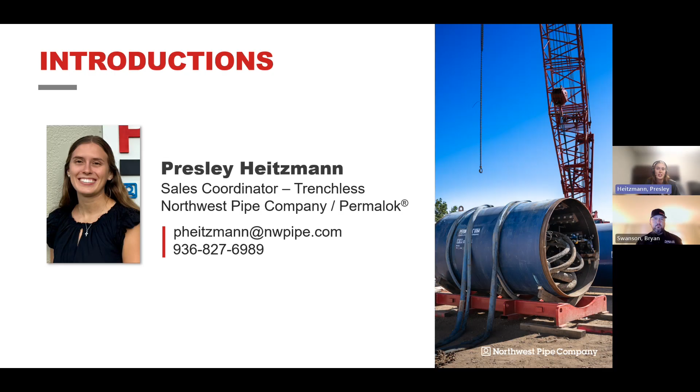Hey guys, my name is Tim Connors, I'm Permalok's project supervisor. I've been with Permalok for almost 5 years now. As the project supervisor, I'm going to basically be taking you from start to finish. I'll take care of all your submittals. Once the quotes come over, I'll be working with your point of contact on your job site, making sure everything is going well. If you have any questions or issues, I want to make sure you give me a call so we can get this taken care of for you right away.

I'll also be keeping you up to date on the production of your project, making sure you understand where we're at—we've begun making the pipe and we're getting ready to finish. I'll be handling the logistics and delivery of your pipe, making sure you're all set for whatever needs you might have at the delivery site and any concerns you may have, we'll take care of that. I'll be taking care of your invoicing as well, and whatever other questions you might have during the project, I'm here for you for whatever you might need. Also, just thanks for trusting us with your project.

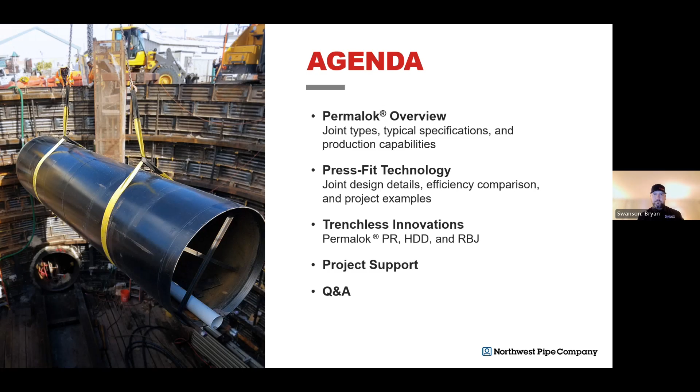A brief overview of our locations. As I stated, Northwest Pipe Company rebranded a couple months ago to be NWPX. Our corporate headquarters is located up in Vancouver, Washington. We have six water transmission system plants across the country and one in Mexico, and as you see there, the dark blue dots are spread out across the entire country.

For precast and engineered infrastructure, we actually have three Geneva plants, all located in the Utah area. They really focus on concrete pipe, concrete structures for drainage, things of that sort. And then we also have our Park facilities, three locations in Texas, geared more towards large water meter vault systems and things like that that are precast.

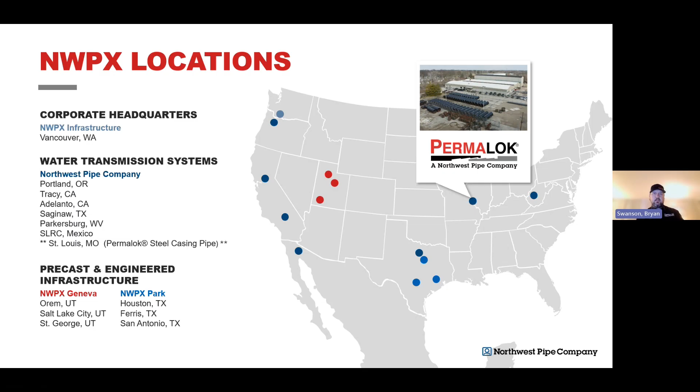But today's webinar highlights the St. Louis, Missouri plant, where Permalok is—I would say 99% of Permalok pipe is made at that facility. You got a little marker there showing you that we're right in the middle of the country, so when we need to, we're able to utilize other facilities in the NWPX family. But for Permalok being centrally located, it's fairly easy logistically to get the pipe wherever it needs to go.

I am going to start out with a short video here that just kind of gives an overview of Permalok.

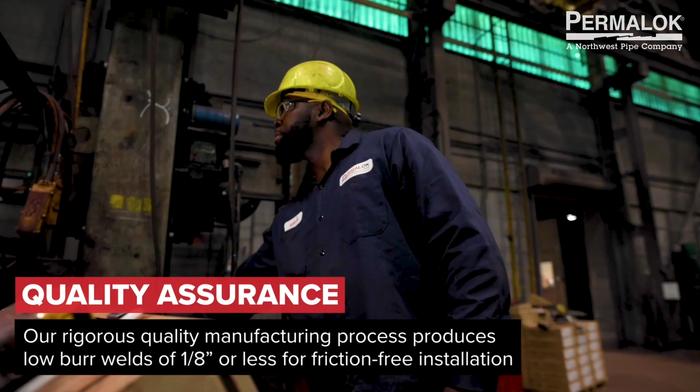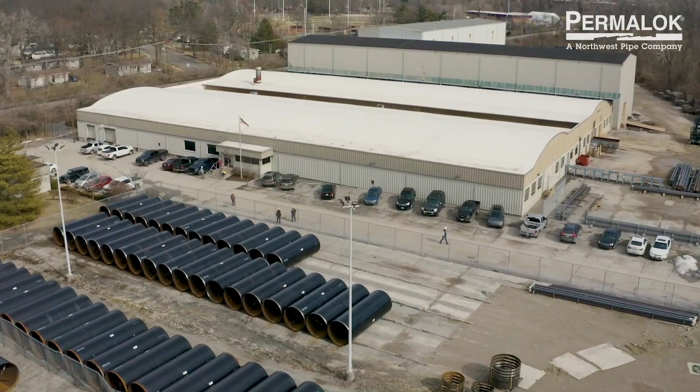All right, so there was a lot of information and a lot of things happening in that video, which throughout the rest of this webinar we'll get a little deeper in detail on what you saw there. So for the first section of the webinar, we're going to give you an overview of what Permalok is, the different joint types, and the specifications that we really produce our pipe to.

So the first question you can ask is, what is Permalok pipe? Permalok pipe is a mechanical press fit joint that eliminates the need for welding. Permalok has been in business over 30 years. In 2018, Northwest Pipe at the time acquired Permalok, which was a privately owned company, and that is now part of the family that Permalok falls under. To date, we have over 4 million feet of Permalok pipe installed in the ground.

We have seven proprietary joint designs currently and are always working on new ones. Each project for Permalok is custom built. We're not a supplier who keeps a stock of any size pipe or anything on a shelf waiting to find a project that we can try and fit it into. Every single project that Permalok takes on is a completely custom build from the beginning.

One of the advantages to Permalok, when you're installing it and you engage the joint, you do hear an audible pop noise, which is very satisfying for anybody in the field putting it in the ground, because it's almost a check of: yes, this joint is engaged, it's ready to go in the ground. It really helps people for whom it's maybe their first time installing Permalok—they can hear that audible pop and know it's time to push pipe. And really the advantage of Permalok pipe versus welded steel casing is it improves efficiency and really brings down the cost of installing a steel casing.

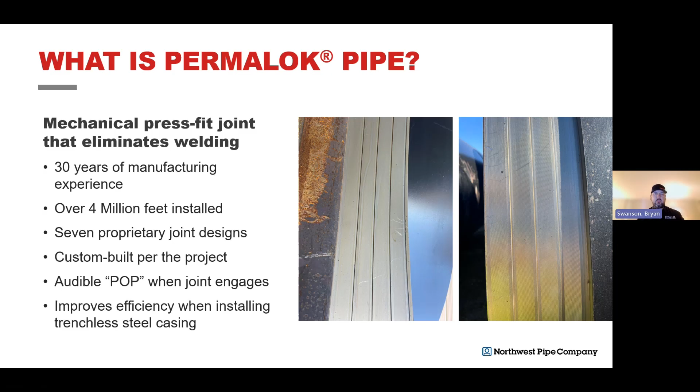So I spoke about the Permalok joints. As I said, we currently have seven patented or patent-pending joints, and they're all designed for a very specific trenchless application. Each one has its own unique characteristics and capabilities that give it the ability to be installed by whatever trenchless method is being utilized.

We have what I would call our flagship joint, which is the T5 joint. It's the one that started it all. And the T7, which I'll get into more detail on later, is very identical to the T5. Those two joints are most commonly used for a jack and bore application or a microtunneling application.

We have our AB joint, which is short for auger bore—again, I'll get into detail about why it's specific to auger boring and how it works. We have our PR joint, which is designed for pipe ramming applications. We have our HDD joint, which was actually the winner of the 2025 NASTT Innovative Product of the Year, which I'll get to again later in more detail.

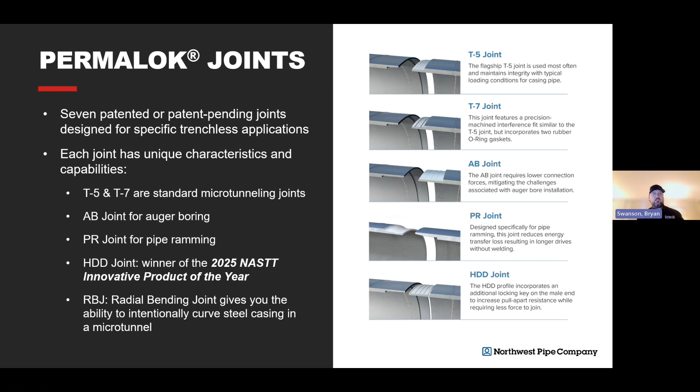And finally, we have our RBJ, which is our radial bending joint, which gives you the ability to intentionally curve steel casing in a microtunnel. I've heard of many examples of people using our standard T5 or T7 joint and creating a curve unintentionally, but the RBJ allows you to do it with intention, and can actually achieve a much tighter radius than what standard steel casing can achieve.

On top of all the different joints, for our steel casing pipe, Permalok can do coatings and linings. I know that coatings and linings are very popular in certain areas of the country, and we've also seen in the industry some engineering firms that were typically oil and gas service engineers come over to the utility side of the business, and they were so used to having coatings and linings on all their steel pipe that they brought over some of that with them.

We typically see for a Permalok steel casing a coal tar epoxy type coating for corrosion resistance. We have many examples of doing that and having success. And typically on the lining side, we'll see some sort of a poly lining that goes inside of the casing for various reasons. With Permalok, one thing that's very important to point out for coatings and linings is that we do not require any kind of a setback. What I mean by that is if you are welding a plain steel casing together and you apply coating to the outside, you're typically going to have about 4 or 5 inches of what we call setback from the end of the pipe. That's so when the contractor goes to weld the pipe, they're not having to do their weld on top of a coating or anything. They've got some bare steel there to make their weld, finish it, let it cool off, and then apply the coating to where they've now welded the joints together.

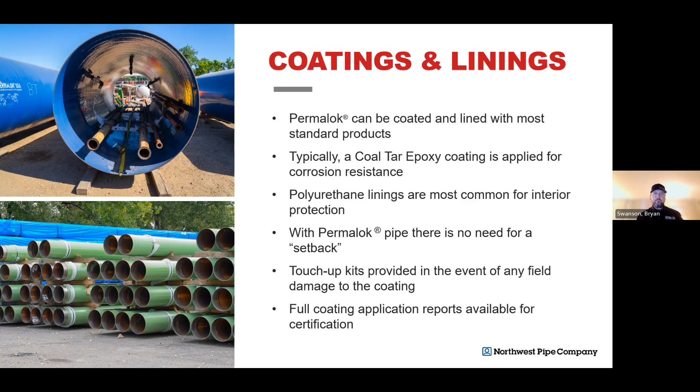So talking about specification, Permalok is a rolled and welded steel plate. It is not a spiral welded coil. We do produce to the ASTM 1097 specification. That is what we typically do. It's kind of our standard. That specification really came to light a few years ago when we noticed that a lot of the specifications in trenchless projects for steel casing weren't really dialed into a steel casing. They were maybe a carrier pipe specification or some other application, and so it really didn't address the needs that the trenchless industry has for steel casing.

I'll get into a little more information on 1097 in a minute. We do have the ability to produce steel casing to the other specifications. We just kind of standardized 1097 as our flag because it's the most stringent, it has the tightest tolerances, and ultimately gives you the best product at the end.

As I said, it's a straight seam welded plate that's rolled into a pipe. We then take our male and female rings, whichever joint it is, T5, T7, HDD, and we actually weld those onto each end of the pipe. Permalok did do some direct profiling a few years back, where we actually would roll a can into a pipe and then we would mill in the male and female ends to the actual pipe. And we found that the quality just was not as controlled as making the rings separate and welding them onto the ends of the pipe.

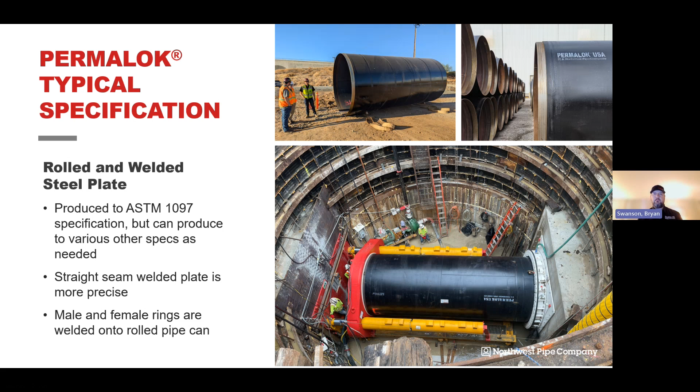So I've got a little chart here that kind of breaks down the different typical specifications that we see in the trenchless industry for steel casing. So the first column there, you'll see 1097, our standard. You'll see A252, A139, and A53. So I want to take you across each row as we go down. You'll see here that all four specifications, when it comes to tolerance on the OD, the outside diameter of the casing, all four are the same, plus or minus 1%. So you know when you get your pipe, it's going to be plus or minus 1% of the actual OD.

Now, as we go down, you'll see the differences in 1097 versus the other specs. So when we talk about roundness, how round is your pipe? Is it egg-shaped? Is it perfectly round? 1097 actually identifies that and says it has to be plus or minus 1%.

A139 also has this same callout, but you'll see the other two, A252 and A53, don't even address it. So if you're putting a specification together for a trenchless casing project and you put in 252 or A53, you already know you're allowing this casing pipe to show up with no parameters for roundness.

Now when we talk about end squareness, again, 1097 only allows plus or minus 1/8 of an inch. 252 and 139 don't address it, and A53 just says be square cut, which could be interpreted a lot of ways.

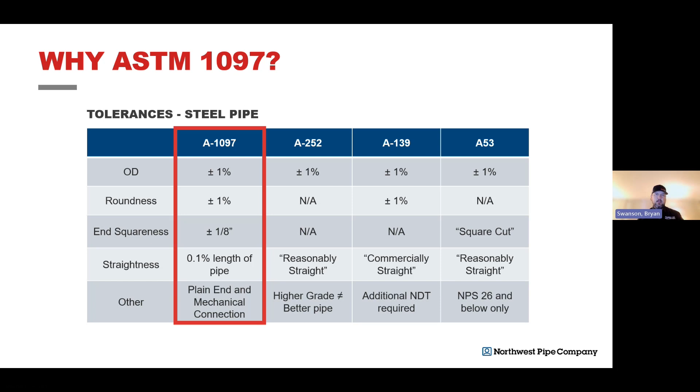That is why Permalok made the decision to make our standard 1097, because we wanted to provide the highest quality product that we possibly could. So at the end of the day, when you look at this chart, it's very clear which one will give you the best quality product.

So now Permalok production. As I said, I don't know of many projects over the years that were not produced in the St. Louis facility. The majority of Permalok pipe comes out of there, and we're centrally located, so logistics aren't really much of a challenge for us anywhere in the United States.

Our facility in St. Louis is currently capable of producing over 3,000 linear feet of pipe per month, and we can utilize all the other plants in our NWPX family as needed. We're actually currently working on some capital expenditure projects that will increase our capabilities at the St. Louis plant and raise that 3,000 linear feet per month number.

OD, we can currently produce anything as small as 8-inch in diameter up to 156-inch. To be honest, the only reason 156-inch is the largest OD is because anything bigger won't fit through one of the doors in our facility.

Wall thicknesses, we can go all the way up to 2.5-inch thick plate to be rolled into a can. I will tell you we do have a minimum of 1/2 inch, and that's really driven by being able to attach the rings to each end and have the amount of force you need to install the pipe.

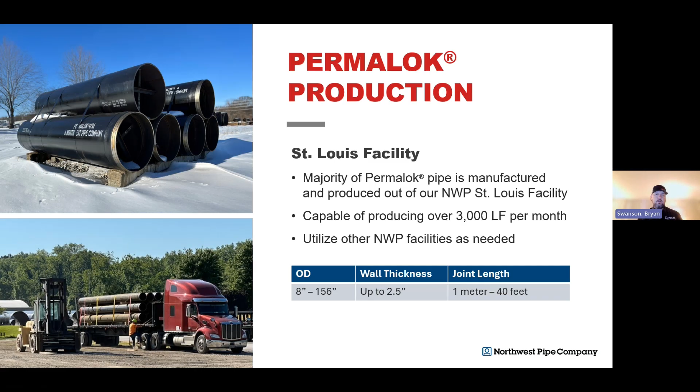Our joint lengths, we can do anything from a 1-meter stick all the way up to a 40-foot long joint, and anything in between. As I said earlier, all of Permalok's projects are completely custom, and you could pick any OD in between 8-inch and 156-inch, and we can make it. Even if it's an off number, we've seen 87.25-inch OD. We can make it because every job is completely custom. We do not have an inventory of pipe that we're trying to push onto anybody.

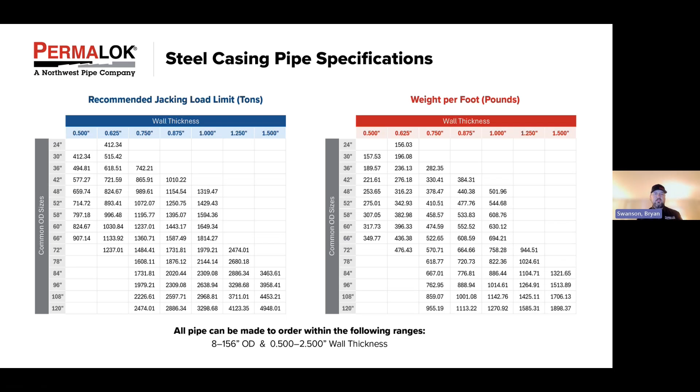We created this pretty simple steel casing pipe specification chart, which we can provide to anybody that would like it. We basically took our most common OD sizes and wall thicknesses, and we supply the information of what our recommended jacking load limits are for the pipe, as well as the weight per foot. I know of a couple engineers already that have tacked this up on the wall next to their desk, and when they're designing trenchless steel casing crossings, they can pull out this chart as a pretty easy cheat sheet to know some of the detailed information they need for the design.

All right, and with that, we're going to dive a little deeper into the actual press fit technology. Starting out with the T5 and T7 joints, which, as I told you, are mainly used for jack and bore applications or microtunneling. They're the most common joints we see produced and installed in the industry. There's a little video here to show you a further view of the actual joints and how they go together.

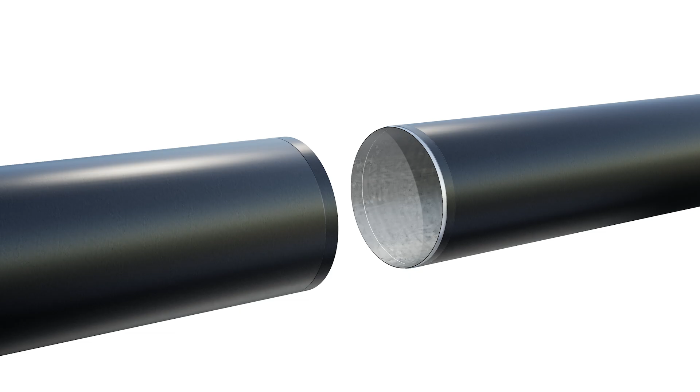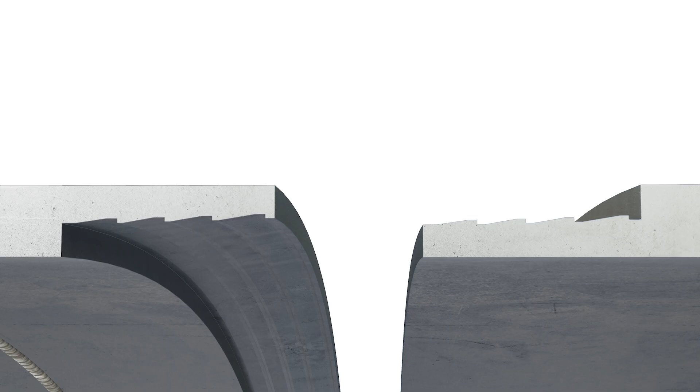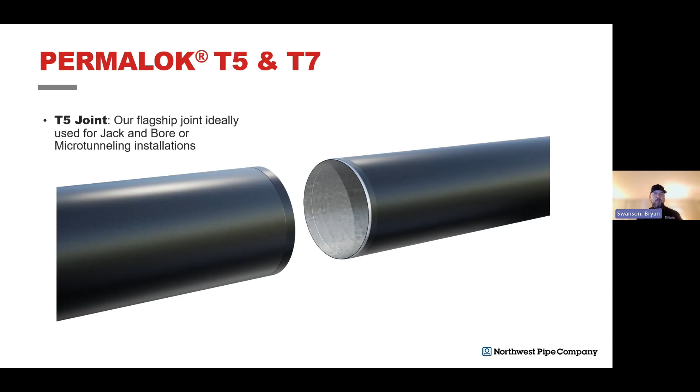So you'll see there, as the joint began to engage, the teeth went over one another until finally locking into place. One other thing that's very important to point out here is once the joints are engaged, you have a smooth OD and a smooth ID. There is no lip from a weld or anything that would cause any problems with your overcut or trying to thread a carrier pipe inside of the casing.

So when we talk about the T5 and T7, what's the difference in the two? The T5, our flagship joint, is very simple. It has the male and female ends that connect and create a solid connection where you don't need to weld. What we did with our T7 joint is we basically took the T5 joint and incorporated 2 O-ring gaskets. These gaskets really enhance the water tightness of the joint.

Now, I've had many contractors install the T5 joint under a water table and things like that, with no problems at all. But we wanted to have the T7 available as an added insurance, if you will, to make the joint even more watertight. One thing I will point out about these joints, we have had them installed in an open cut application as well. So if you've got a setup where you can get enough push from a track hoe or something similar, you can engage the joints in an open cut environment as well.

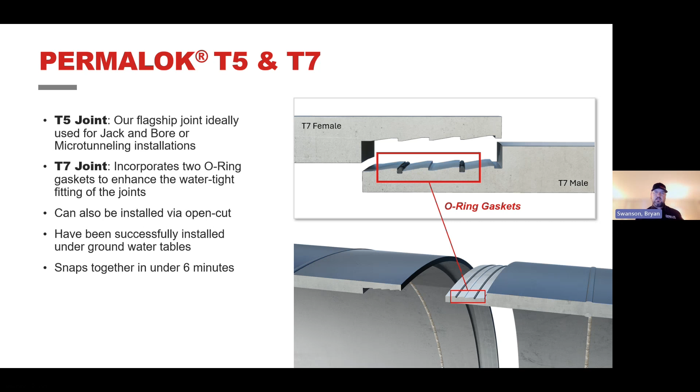When I talk about groundwater tables, depending where you're at in the country, that's when we really start introducing the T7. I personally, in my contractor days, have installed T5 joints in just under 2 bar of pressure with no problem, and T7s above 2 bars of pressure. And the biggest thing about these joints, and we keep talking about efficiency, they snap together in under 6 minutes.

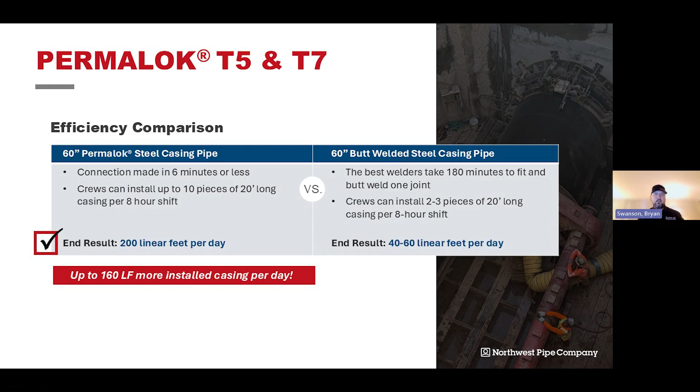So how does it go together? How do the T5 and T7 joints connect? So all of the submittals that we supply, we even include instruction guidelines of how to install our pipe. We also will come out to your job site at any time and help the crew. Maybe it's their first time putting Permalok together. I myself, Tim, some others on our team are happy to join on the job site and really get the crew dialed in on how it goes together.

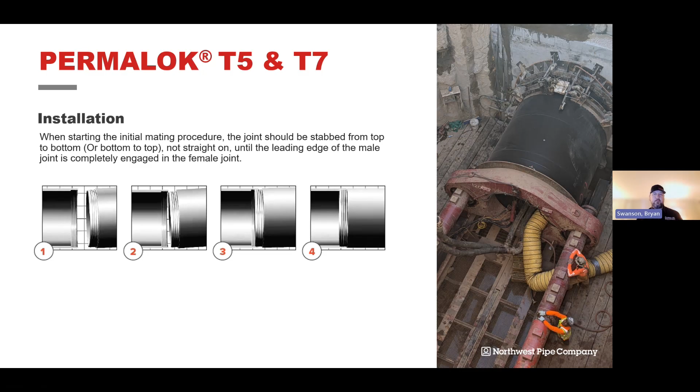With the T5 and T7, you basically have one joint. You can see in the picture there that you've already pushed into a certain footage. You leave a few feet sticking out of the ground. Your next joint is then lowered in the ground from above, and you want to mate up the top of the next joint with the top of the joint that's already installed. What that does is just start to get it lined up. Once you have that lined up, you lower the joint down and get it straight with the already installed pipe. You give it a good push, and you'll hear the loud pop that we discussed to let you know the joint is fully engaged.

So for our T5 joint, we wanted to highlight a project here that we did last year. This was the Perris Valley Pipeline I-215 crossing. This particular project installed almost 3,000 linear feet of 120-inch OD Permalok steel casing with the T5 joint. And on top of that, our water transmission side of the business also supplied the carrier pipe of almost 3,000 linear feet, 96-inch transmission line. J.W. Fowler was the Trenchless sub on this project.

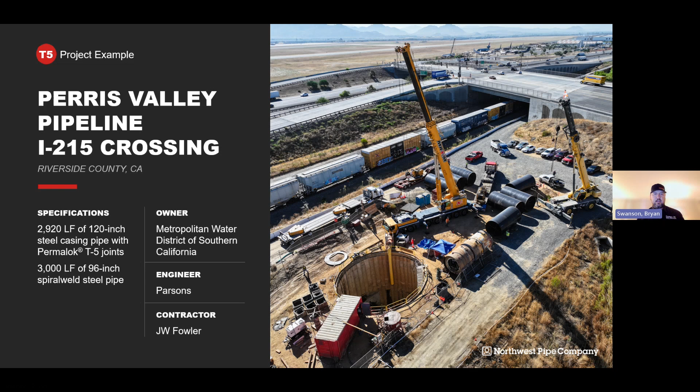This project was very crucial to this program because it basically connected 2 separate segments of the Perris Valley Pipeline that had been installed 10 years before this project ever happened. So they had some geological issues, some other items that they were working through, and it took them over 10 years to get everything lined out just to get this project going. And at the end of the day, this segment was able to connect the entire program and allow them to start utilizing it.

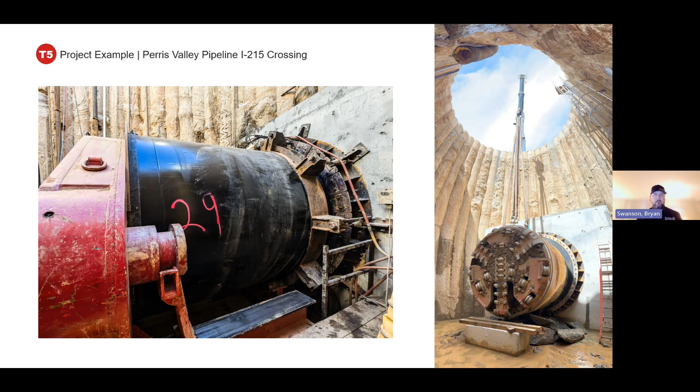This is a nice aerial view of one of the shafts on this project where a connection was made. If you look closely, you'll see some of the 96-inch transmission line pipe sitting there, ready to be lowered into the hole and installed inside of the Permalok casing.

Overall, it was a great project for everybody. We really appreciated J.W. Fowler and the whole team for including us, and we were on site for this project for the final hole out.

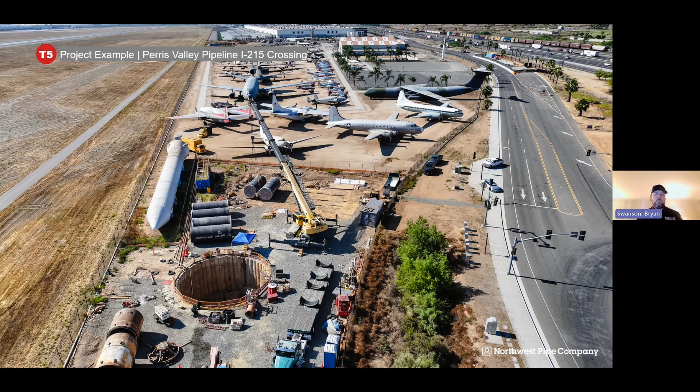Next, we'll talk about the T7 joint. This project was the Red River Valley Water Supply Project intake tunnel. Anytime you're talking about something that's going to be underwater, that's where the T7 with the O-ring gaskets really becomes the one to involve. This particular project had about 1,600 linear feet of 72-inch Permalok T7 joint. We actually produced this pipe to the C200 spec, not 1097.

Michels was the trenchless contractor on this project. The real need here was pulling water out of the Missouri River and taking it across about a 167-mile pipeline to various communities throughout North Dakota.

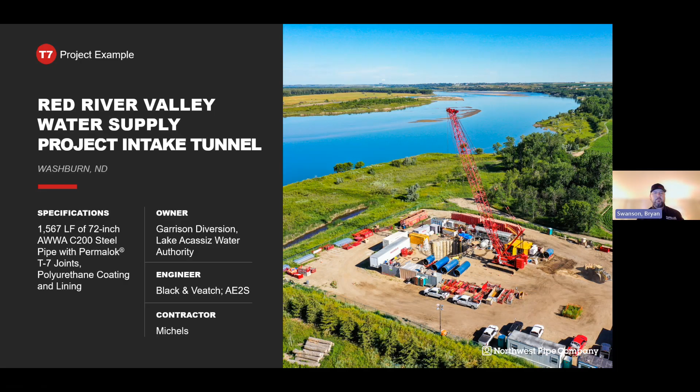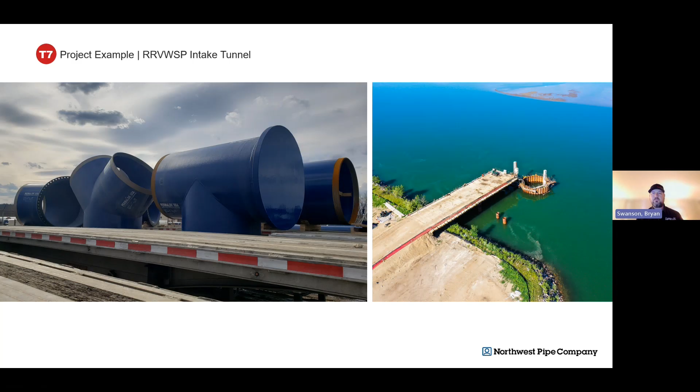On the right, you'll see one of the retrieval shafts that was built in the actual Missouri River. And finally, here's a picture of the Permalok pipe that was coated and lined with a poly lining and a poly coating, going into the ground inside the shaft.

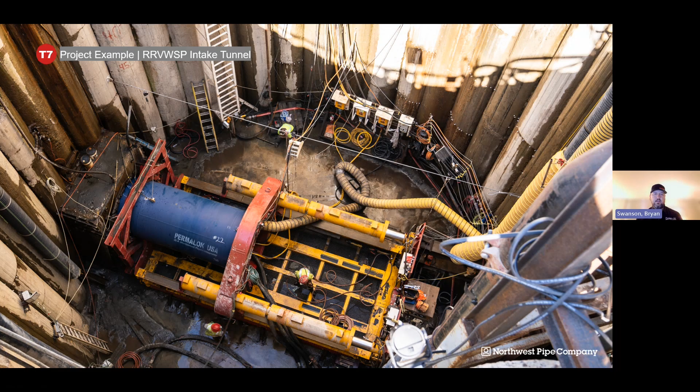Our next joint I want to talk about is the Permalok CC joint, which stands for cycle casing. When we think about auger boring and pilot tube guided boring, many times if you're using those installation methods for a larger casing, say a 60-inch, you'll do what's called a cycle.

You'll shoot your pilot, which is about a 4-inch OD pilot tube. Then you'll do what we call a cycle of a 24-inch or 30-inch or something in that ballpark, where you want to chew off some of the excavation you'll have to do to get to 60 inches. Historically, you've had to do that with plain steel casing that you weld together. Then, as you get that next size up installed, call it 30-inch in this example, when you get ready to go behind that with your next step up—whether it be 48, 54, or 60—you push that 30-inch casing out of the exit pit as you install the larger diameter behind it.

When you do that with a welded casing, you then have to torch it, cut it, and remove that steel casing from the exit pit as you advance, and that casing takes a lot of work to be usable again. So at Permalok, we decided we've got a solution for that. We created the CC joint to be used as a cycle casing that you don't have to weld together, and you also don't have to torch or cut on the exit side, basically ruining the casing. You can pull it apart on the exit side and reuse it over and over again. It's really designed to be kind of a slip-joint install for a stepping-up process.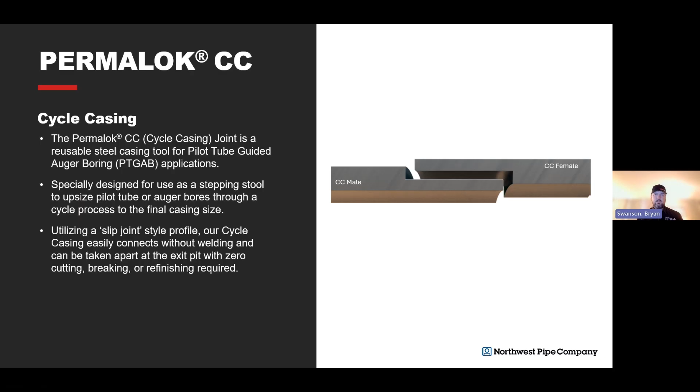That transitions straight into our AB joint, the auger bore joint. Because of the nature of an auger bore install, you can't really install it the same way as a T5 or T7. If you remember, I said when installing T5 and T7 joints, you want to line up the top of the joint first, lower the pipe down to get it straight, and then push.

So what we did, if you were standing next to a pipe that had an auger bore male end and a T5 male end, you would notice that the auger bore joint actually has a longer profile than the T5 does. The reason we did this is to allow it more space for the joint to find itself and push in a straight push installation manner, not have to come down at an angle.

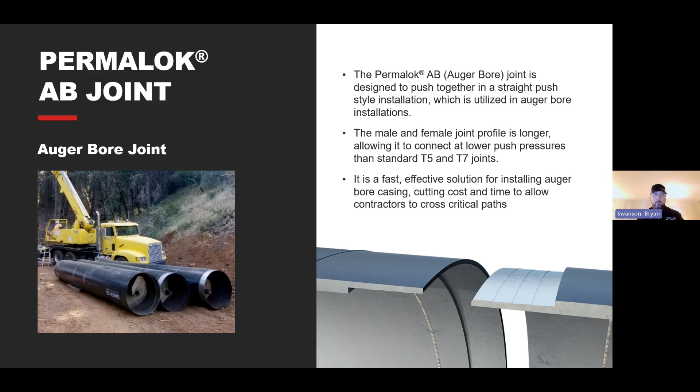We also found that with the longer profile, it reduced the jacking force needed to engage the joint. Typically with an auger bore joint, you'll see about half of the push force that it would take for a T5 or T7 to fully engage. It's a fast, effective solution for installing the auger bore casing. Everything we do is about reducing cost, being faster, and increasing efficiency.

So now let's talk about some of the trenchless innovations that we have—some of the things we've been working on or are working on that are exciting. I'm going to start this out with the Permalok PR joint.

The purpose of this was to allow the energy transfer that's necessary for a PR install to move across the joint. We had some contractors before this joint was available that would take our standard T5 joint and try to pipe ram it. What they found was at the actual joint where the male and female ends meet, there was a significant energy loss. The energy was not transferring from the pipe ram machine all the way down the string.

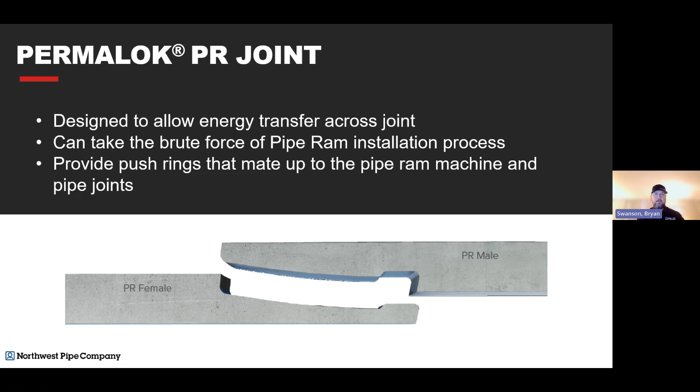Which allow you to then move from one joint to the next. Some of the projects we've done with the PR joint to date, this year alone, we've done 3. We have more slated. Again, it's a Permalok joint—it snaps together in under 6 minutes. We can make this joint like any of our other pipe, anywhere from a 3-foot stick up to a 40-foot joint.

I will point out as well, I am currently in Salt Lake City for a pipe ram job that starts tomorrow with BT, where we will be presenting at the No Dig show next year on this particular project, and we will have a bunch of data collected on the efficiencies of the PR joint and how well it installs. One other thing I want to point out with the PR joint—it can be used for conductor casings. Anybody that's been involved with horizontal directional drills or anywhere else where a conductor casing was necessary, you can utilize the PR joint for the conductor casing install, which also cuts down on time and cost.

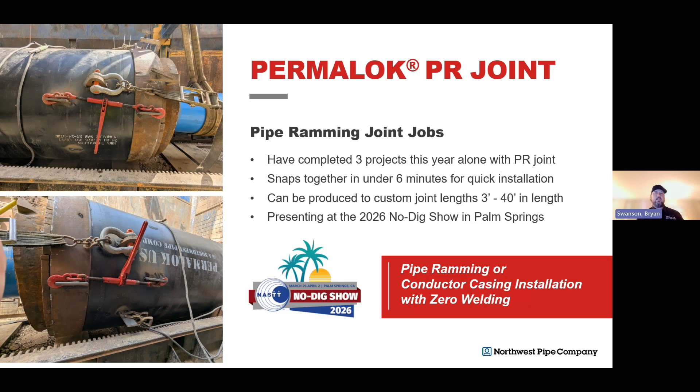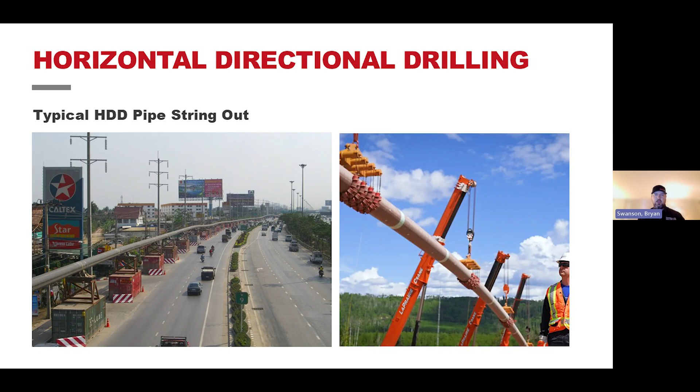Well, not anymore, because with the Permalok HDD joint, you don't need any of that. The HDD joint is a direct push joint system specifically for horizontal directional drilling. It eliminates the need for a pipe string out, any welding, and all the additional equipment that comes with it. It reduces the project footprint and all the associated construction cost.

It utilizes a direct push to engage the joints rather than the pulling technique traditionally used in HDD. It provides the same allowable bend radius as a standard HDD installation, which is about 100 feet per OD inch.

So we basically said, you've got this maxi rig that can pull over 1 million pounds of force. Why can't you push with it? So we did all kinds of internal testing to design the joint and found out, yes, you can push with it. And I have the perfect example of doing this.

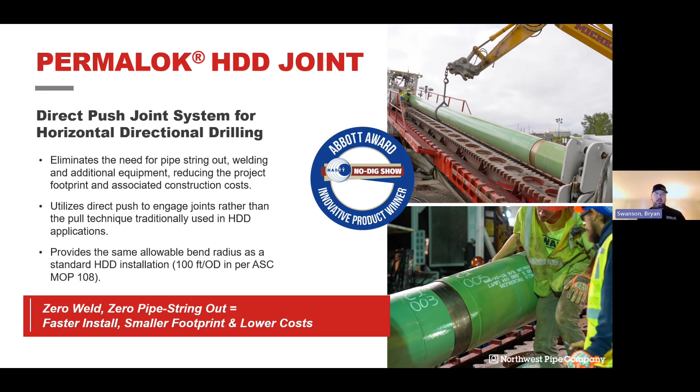The Champlain Hudson Power Express project happened last year. I'm sure a lot of you have heard of the Champlain Hudson Power Express program, but we were specifically on one portion of it with Michels Trenchless. We actually installed over 10,000 linear feet of 20-inch steel casing. It was two drives side by side, 5,200 linear feet each.

And this project actually, we found out recently, won the Trenchless Technology 2025 Project of the Year.

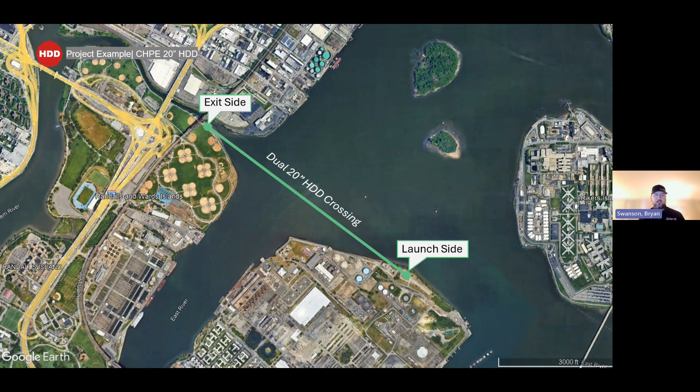So Michels came to us, and we worked with them through a redesign to utilize our HDD joint to get both of these casings successfully installed under the river.

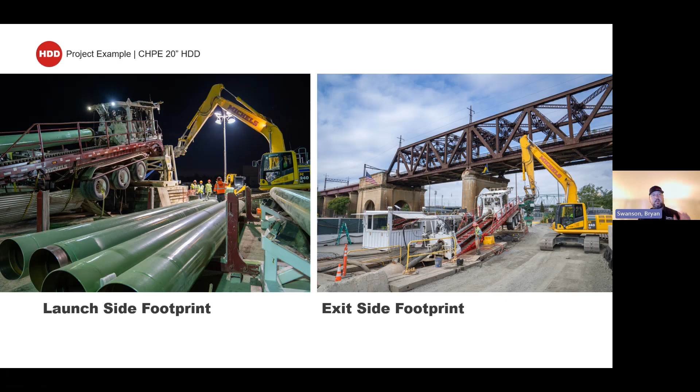You'll see on the launch side, the maxi rig was raised up for the installation entry angle. They had pipe staged right next to the rig, ready to go, so as they installed a section of casing, they could load the next one in. On the exit side, you'll see a smaller rig that really was only utilized to remove the drill stem that they had, the pilot stem. And what we found during install was they were putting a new joint of pipe up, connecting it, and ready to push faster than they could remove the pilot stem on the exit side.

So how does the joint connection work? Well, you'll see on the left, the only equipment modification needed was a clamp system to hold pipe that had already been installed, for I'd say the first 400 or 500 feet. Once they got past that mark, we found that the friction underground actually held the pipe in place well enough that they didn't even need the clamp anymore.

So there you'll see they're fitting up the new joint to a joint that's already been pushed, and what the joint looks like completely together. And I've got a short video here showing you how long it took to get the pipe actually together.

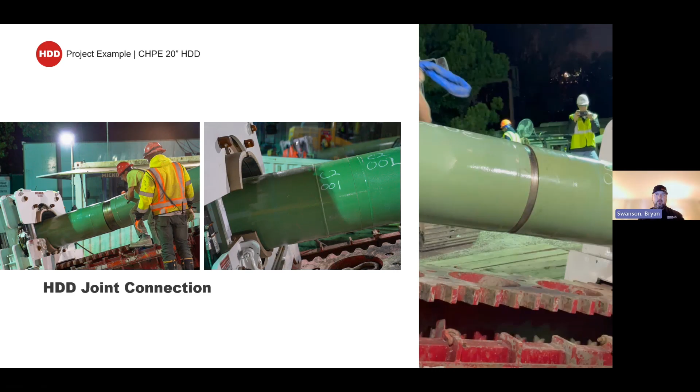So I'm sure you heard the audible pop there that I've been talking about. That's what let everybody know, okay, it's together, we can start pushing.

The last joint that I want to talk about in our innovations portion is the one we're probably the most excited about, our Permalok radial bending joint, or RBJ. If you've heard any presentations we've given over the last couple of years, we have been talking about this for a long time. But I've got good news: we've got two jobs going in the ground early next year with it. It is the first steel casing designed to intentionally curve a microtunnel.

With that, you can eliminate shafts along the tunnel alignment. It gives you the flexibility to start and finish tunnels where it warrants. There is no set radius for it; we do look at it on a case-by-case basis. But I can tell you we were recently looking at a project of a 78-inch OD casing, and we were able to get that radius down to 2,500 feet.

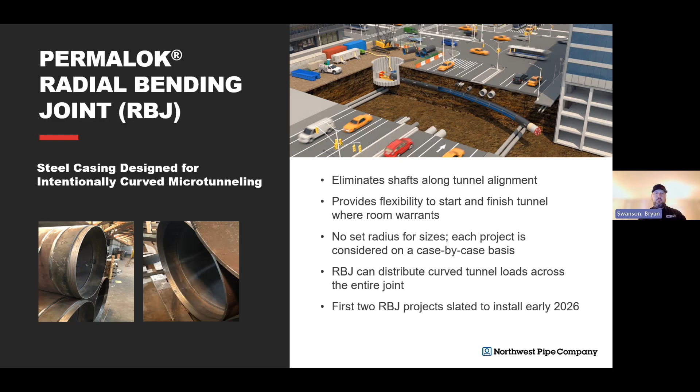The magic of the RBJ is the ability of the joint to distribute the load across the entire joint as it's installed. It does not point load at any particular section of the drive. We've got one project being installed late January, early February next year with the RBJ, and another one slated up in May with Northeast Remsco and Huckstead. I do want to play a short video here for you of the actual RBJ process.

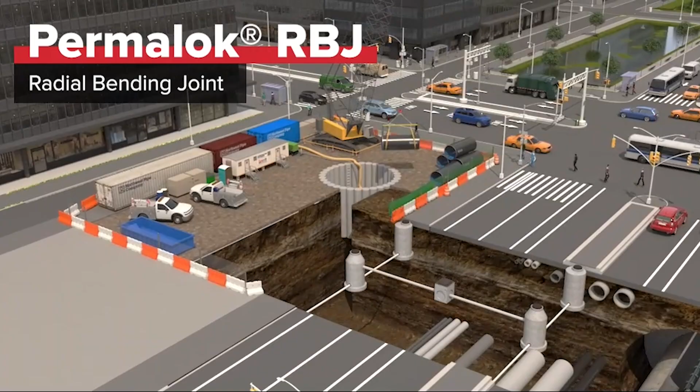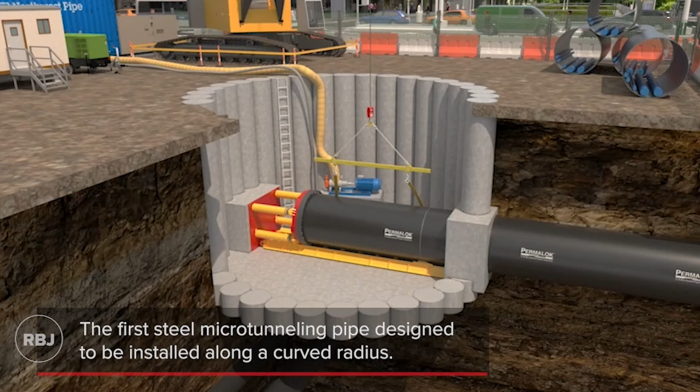And Bryan, feel free to walk us through the process that we're seeing here. Sure. So they're advancing the machine, coming up on a subway crossing where they're going over the subway.

As you'll see here, they jack in one joint of casing, load the next one, and as you'll see right here at the subway, they're actually making the curve to go around various utilities, other things that are in the ground to get to the exit shaft.

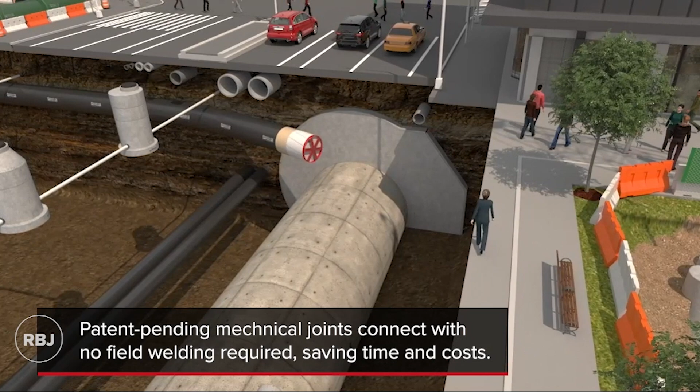You notice there's people walking, cars driving, all kinds of stuff going on above ground, but you're able to utilize the RBJ technology to make that curve and get a path to the exit shaft and get the casing installed. So we're really excited about the RBJ. We've got a couple jobs coming up. We will be doing papers on those next year once we have them in the ground as well.

So the last section here I'd like to talk about is our project support section. We do have design assistance, and what I mean by that is we want to work with owners and engineers and contractors from the very beginning of projects. We do have in-house engineering to review alignments and look at jacking forces, see ground conditions, and really help an engineer or an owner or whoever look at a project up front and say, yes, this works because of this, or it doesn't because of this.

We have both steel pipe and concrete jacking pipe expertise. We're able to provide recommendations on sizes, wall thicknesses, or strengths. We've got over 20 years of past experience in the field with installation methods that we can utilize to help with the design. We really feel like the more collaboration there is in the trenchless industry up front, the better a project can go both through the bidding process and the construction process.

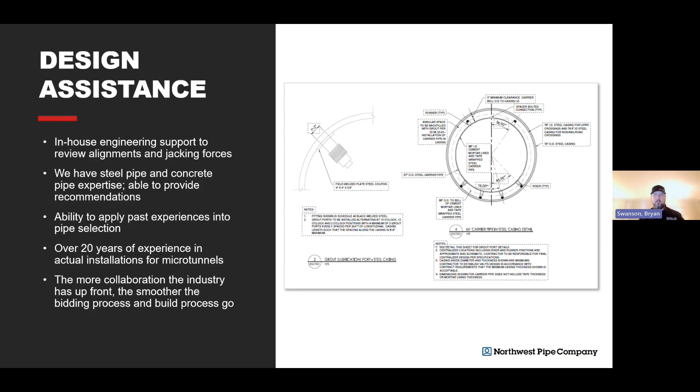Let's bring the suppliers, the engineers, the owners, and the contractors all to the table up front and really have a better product in the end for everyone to have a successful project.

The next piece is our project management approach. I am going to ask Tim to come on and talk through this slide. Okay, so from the minute Bryan hands over the project submittal to us, or basically the quote, I take it from there.

So I'm going to basically get some details from your point of contact, trying to get an idea of how you want your drawing set up, your plates or your certs for your job, any orders to other needs that might need to happen to get this onto final submittal to your engineers.

I'm also basically going to be handling a lot of the scheduling with our plant managers and our plant supervisors to make sure when we can get your product into the production as soon as possible. If the time is basically hurry up and we need this right away, or we have a little bit of time, we can kind of adjust to your schedule however we need to do.

Open communication is always going to be a high priority for us. So I'm available basically by text, email, phone calls, whenever you might need. Any flexibility that might be needed with you guys, please just let us know, and we will basically do anything and everything that we can to make sure your project goes as smoothly as possible.

And then the customization of everything, just whatever you might need us to do to make sure that all your needs are taken care of. Delivery ends, any sort of special instructions needed on submittals and drawings, we're going to be there with you from the very beginning of the project to the very end. We want to make sure your project goes as smoothly as possible and make sure that you continue to get business.

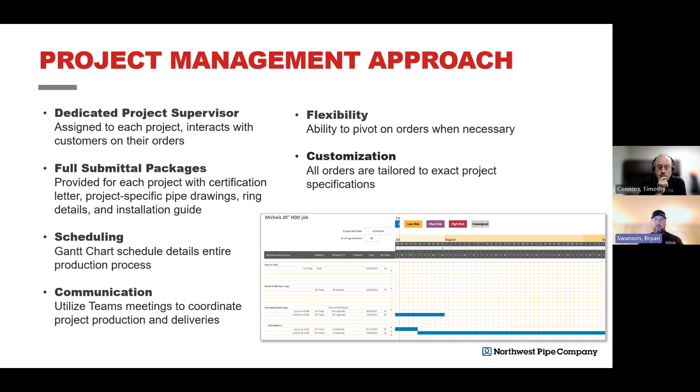We do have a whole team of people, like I've said many times. You obviously have listened to me blab on for almost an hour. You met Presley earlier. You've heard Tim talk a little bit. But I do want to point out our operations manager, Bill Cason, is extremely good at what he does. He's in charge of the entire operations side of things. He's traveling to job sites. He's helping with installs. He's answering questions as he needs to as well.

And Jeremy Howard, our plant manager, has done a tremendous job running the plant, the day in, day out things, all the crews that are producing the pipe. And Jeremy actually spent a few years, I think 3 to 5 years, on the commercial side of our business. So he understands the commercial side as well and has a lot of great relationships with our customers. And that's how we want it to be.

We want our customers to want to work with us, not just because we have extremely quality pipe, but because we're going to do everything that we can to make sure they're successful. Same goes for owners and engineers. We want the phone calls of, I think I'm designing a job that has this, what do you guys think, what have you done in the past, what's worked? We want those conversations, we want those teams meetings. We want to get our knowledge and information out in the industry to make it better as a whole.